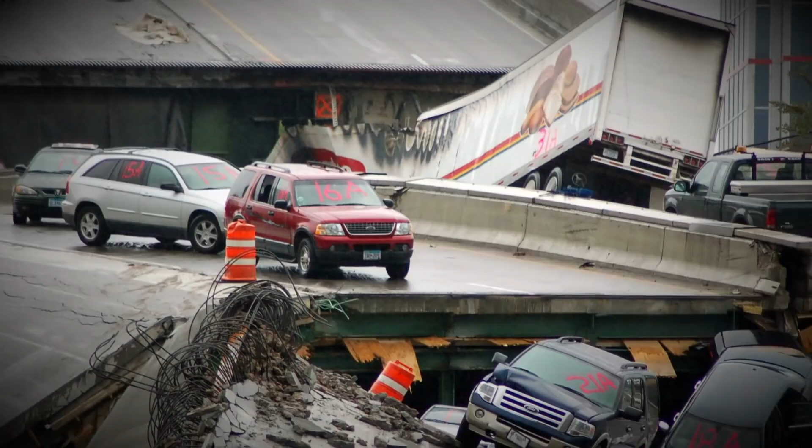But little did the commuters know that they were travelling on borrowed time. The bridge failed in the blink of an eye, plunging the vehicles down into the Mississippi River below. Today we're covering the Mississippi Bridge collapse, and as such I'm going to rate it here 6 on my disaster scale, and again here 6 on my historical legacy scale.

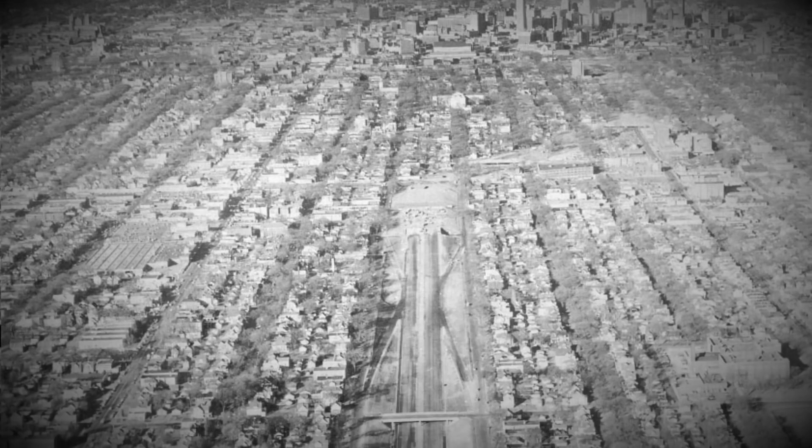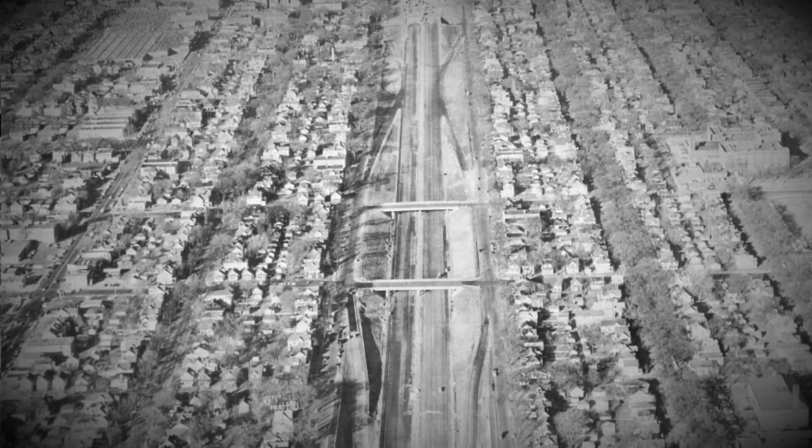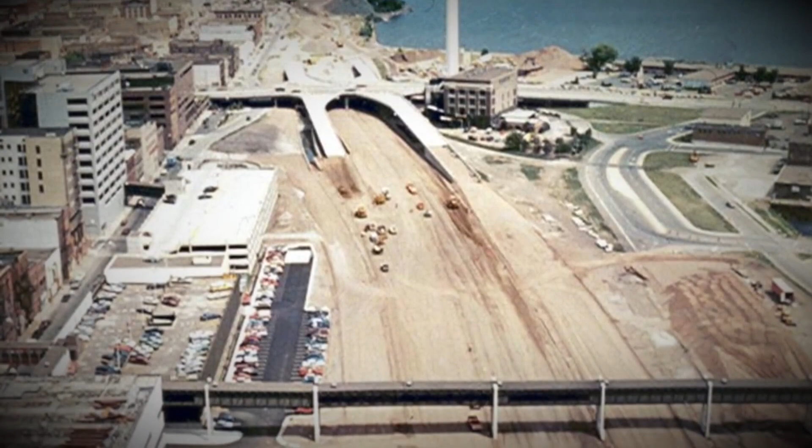In the early 1960s, plans were drawn up to cross the Mississippi River as part of the colossal construction of the I-35, a monumental 1,569-mile north-south cross-country interstate highway project. Parts of what would become the I-35 had been constructed pre-1956, the date on which the interstate system was formed in the US. The route would eventually be completed in 1982, and it ran from Minnesota in the north all the way down to Texas in the south. And part of the route would have to travel through Minneapolis, necessitating the crossing of the Mississippi River.

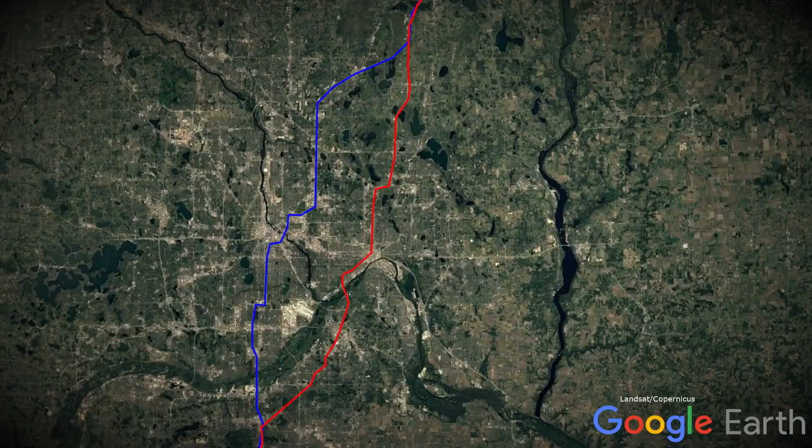As a side, the I-35 in the region actually splits into 2, the I-35 West and the I-35 East. This allowed the highway to be brought into Minneapolis and St. Paul respectively. Both branches rejoined in Columbus. In 1962, plans were begun to be put on paper on the I-35 West River crossing. As part of the design process, engineering firm Sverdrup and Parcel were hired on to produce a preliminary engineering report, create final design plans, checked by a registered professional engineer, and check design computations.

On the 12th of April 1963, 2 options were presented to the Minnesota Department of Transport, a 4 and a 2 truss design. Sverdrup and Parcel recommended the latter for economic reasons, which was the option selected by the department. The accompanying report from Sverdrup and Parcel stated welding is planned throughout for the makeup of girders and truss members, and, in this connection, high yield strength steel conforming to T1 will be used extensively. They also commented that the use of welding compared to riveting would save the department money, but in reality the use of T1 steel had an overall cost implication.

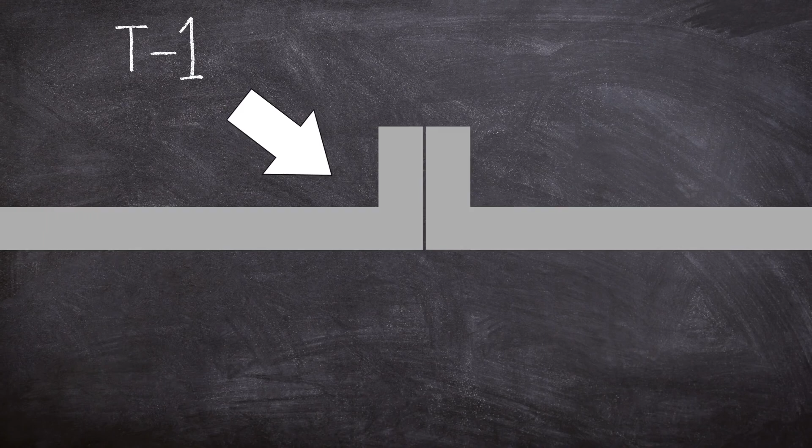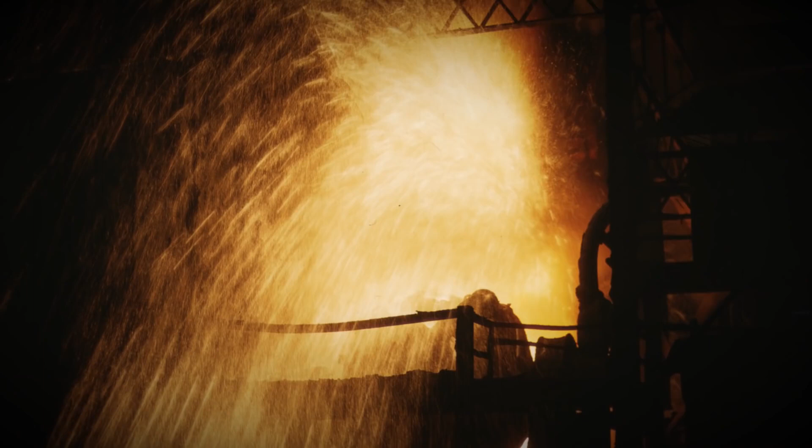By September, both Minnesota Department of Transport and the Federal Highways Administration began to express reservations about using such large quantities of T1 steel in the bridge. You see, T1 is a very strong construction material, but this comes with a drawback: the way it is heat treated. And as such, members made of T1 are limited by the size of the heat treatment facilities where they are produced. This meant that there would be a need for more joints, which incurred extra cost during construction. Not only that, but the material was more expensive compared to other steel types at the time. T1 was 38 cents per pound, compared to the weaker A441 steel that was around 31 cents per pound, and could be made in longer sections due to the different heat treatment processes.

During the March 1964 conference, Minnesota Department of Transport and the Federal Highways Administration decided that Sverdrup and Parcel eliminate T1 steel from all main truss members and use A441 and A242 steels instead. This required a redesign, as the A441 and A242 steel had a capacity of 27,000 pounds per square inch versus 45,000 pounds per square inch for T1. Due to the weaker steel, the design had to be replanned and required thicker steel, which in turn added more deadweight to the structure.

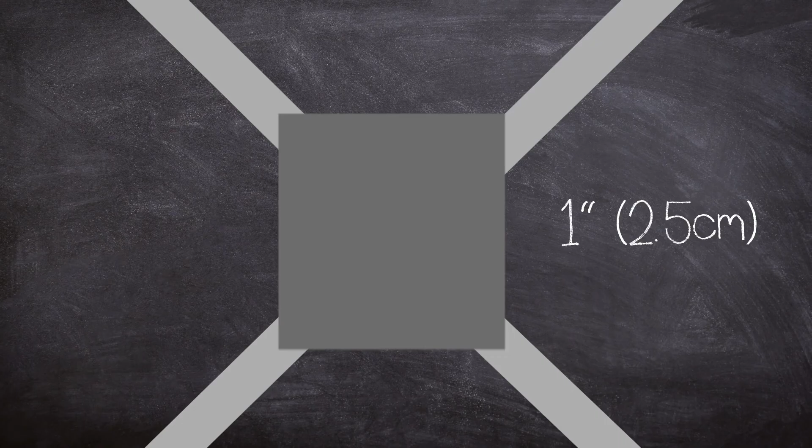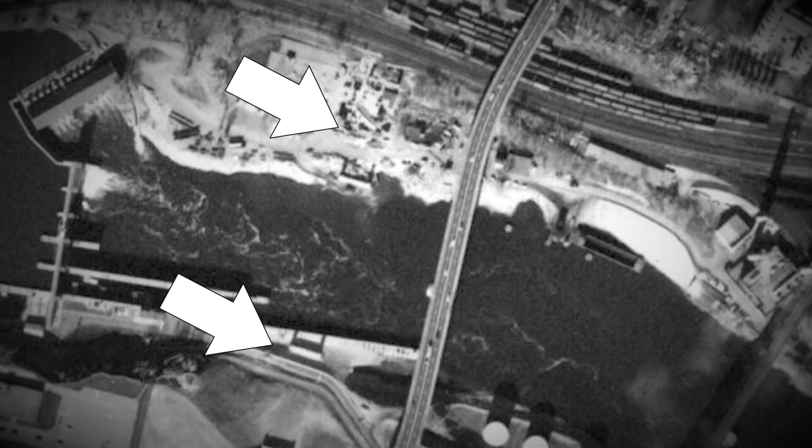However, some of the original 0.5-inch T1 steel gussets weren't thickened when the change to weaker steel was employed. The ones that were improved in the final design were up to 1 inch thick, and it might be worthwhile remembering this for later on. The final design was settled upon by March 1965. However, initial works to build the piers had already started in 1964. Let's first look at the actual design accepted.

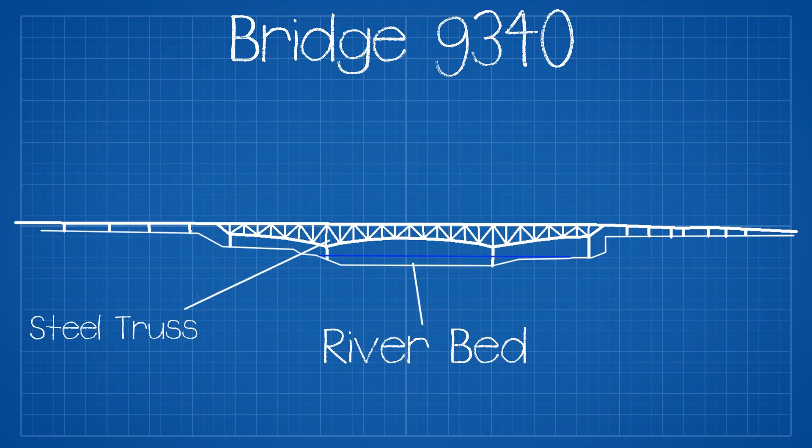The structure used welded built-up steel beams for girders and truss members, with riveted and bolted connections. The bridge was 1,907 feet long and carried 8 lanes of traffic, 4 northbound and 4 southbound. The bridge had 13 reinforced concrete piers and 14 spans, numbered south to north.

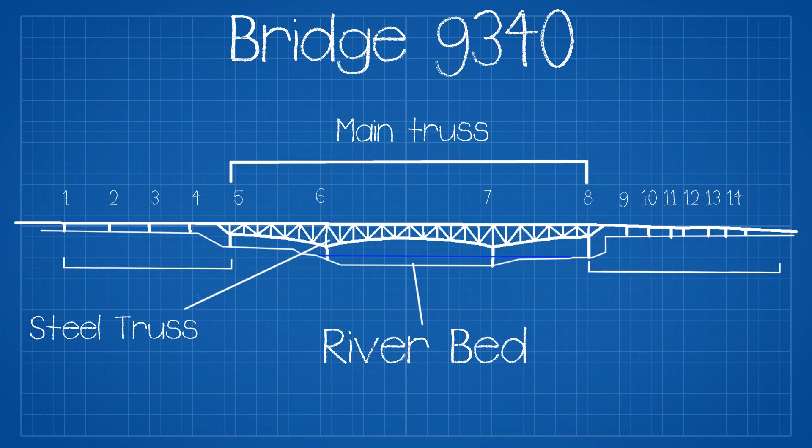11 of the 14 spans were approach spans to the deck truss portion, which was only 3 spans long but was over 1,000 feet in length. The bridge deck in the approach spans was supported by continuous welded steel plate girders or by continuous voided slab construction. The 3 main spans used deck truss construction, consisting of 2 reinforced concrete deck slabs separated by about 6 inches, with a total width of the deck slabs of about 113 feet 4 inches. This was enough to accommodate all 8 lanes of traffic.

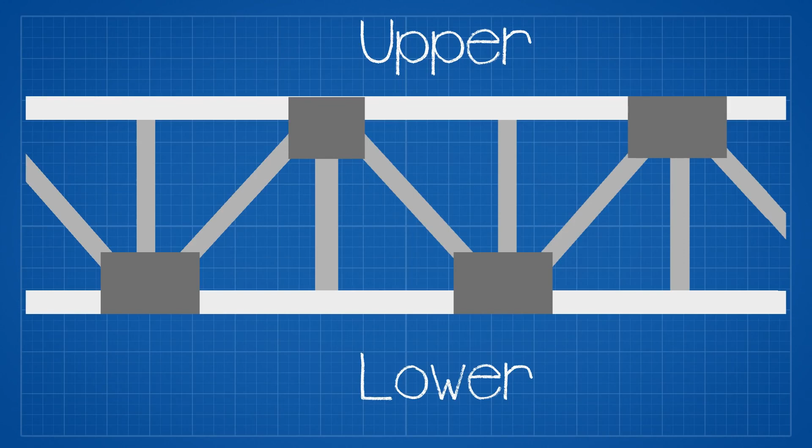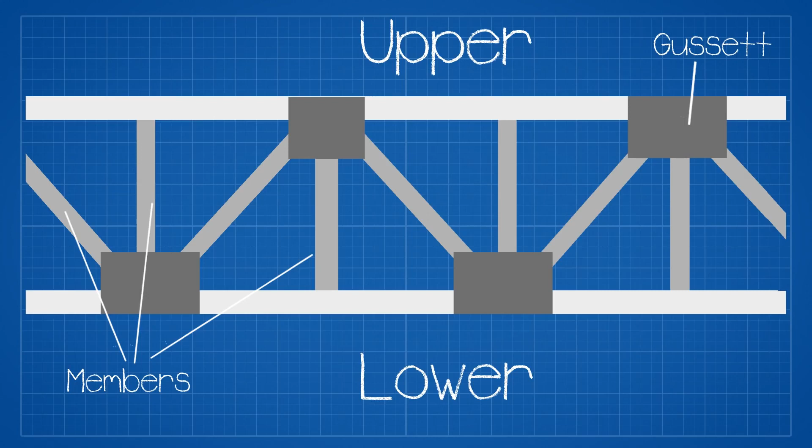The main trusses comprised 2 parallel main sections. This was made up of upper and lower chords that extended the length of the deck truss portion of the bridge. For added strength, the chords were connected by straight, vertical and diagonal members. To connect these together at each junction, gusset plates were installed and riveted together. These were made of steel. To connect the east and west trusses, bracing members were utilised.

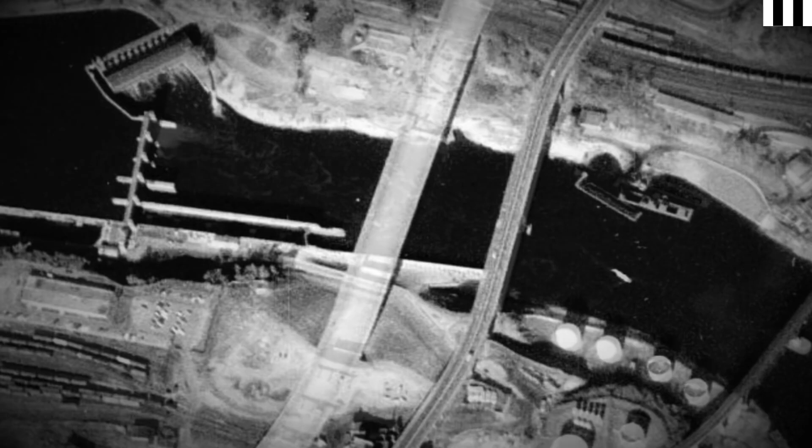Construction was completed in 1967 and opened to traffic, and for 10 years or so all seemed well, until it reached its first renovation in 1977. Back in 1967, when the bridge was initially constructed, it had 1.5 inches of concrete over the uncoated top reinforcing bars of the bridge deck. This was pretty standard for the time, but by the 1970s a number of similar structures were experiencing rebar corrosion.

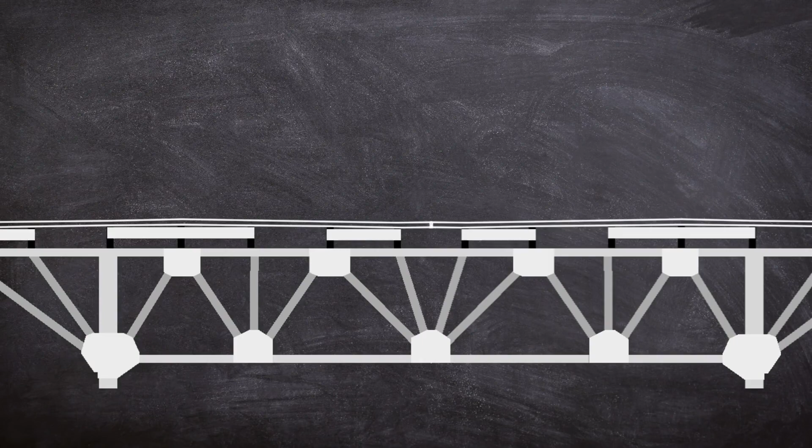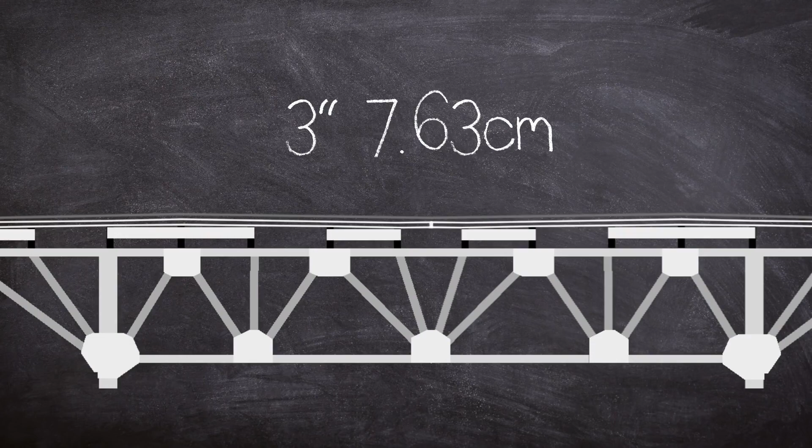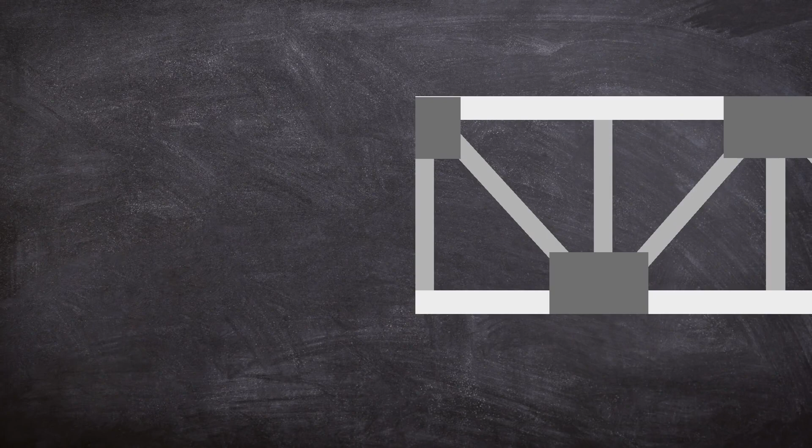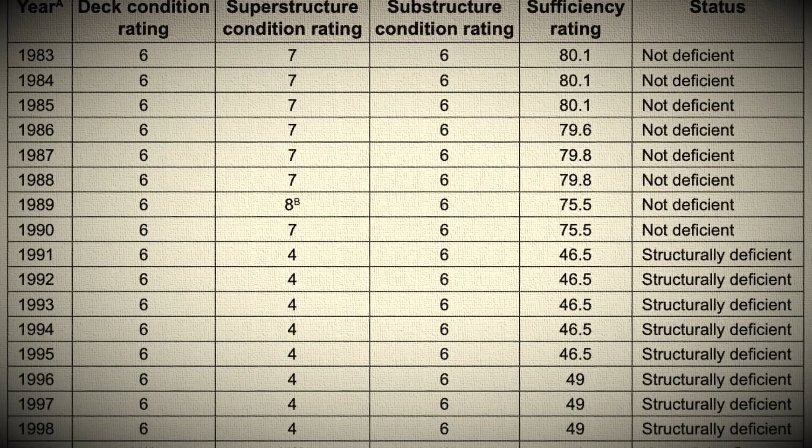In order to combat this, a thicker layer of concrete was poured on top of the bridge, bringing the total thickness to 3 inches. But this came with an issue, and that was the increase in weight on the truss structure, in the region of roughly 3 million pounds or 13.4%. All throughout the bridge's life, the structure received an annual inspection, starting in 1971. Part of these inspections were a general condition and evaluation report, but after 1991, the results took a nosedive.

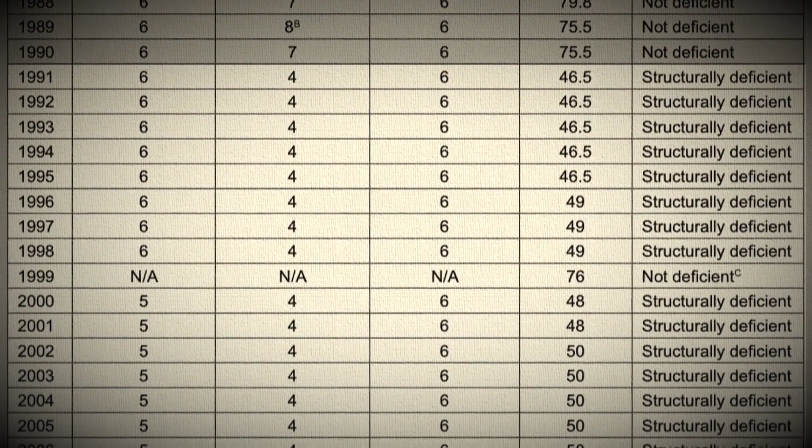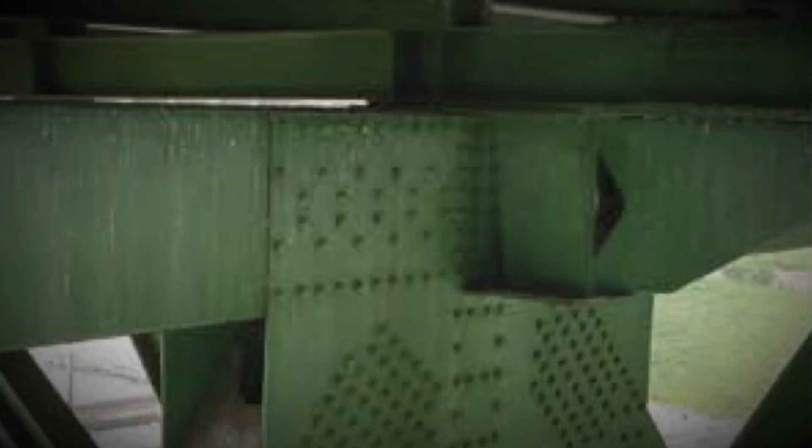As part of the annual survey, the bridge is given a status, and at the start of the 1990s, it received an unsatisfactory structural deficiency rating. A status does not indicate that a bridge is unsafe, but only that the structure is in need of maintenance, repair or eventual rehabilitation, and as such, a weight restriction is given. However, in 1993, some gusset plates had experienced corrosion.

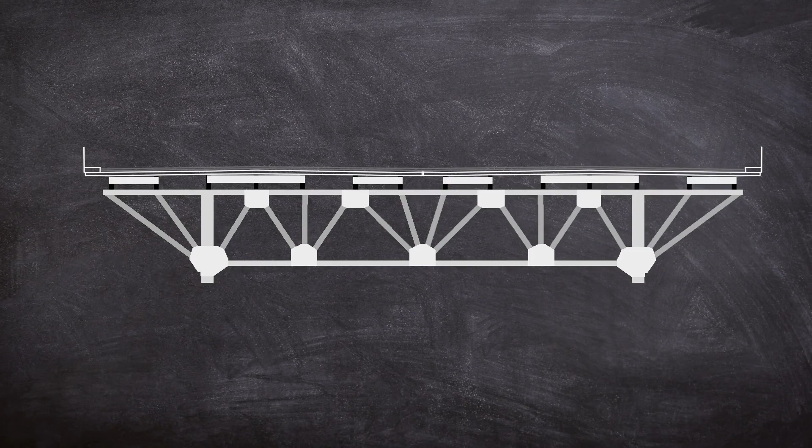In 1998, another refurbishment project was underway at the bridge. This involved improving several features, including the central barrier and outside traffic railings, which did not meet the at-the-time safety standards. And like in 1977, the permanent changes increased the dead load on the bridge by about 1.13 million pounds, or 6.1%. In the early 2000s, cracking was discovered and was drilled out and reinforced, and a process of 6-monthly inspections was enacted. And this brings us to the bridge's final renovation, leading to 4 of the 8 lanes being closed on the I-35W bridge.

The 2007 renovation involved removing some of the concrete and adding a 2-inch thick concrete overlay on the deck. Part of the construction works involved staging materials on the bridge, ready for use. This increased the static load by roughly 578,000 pounds, right over one of the 0.5-inch thin gusset plates. During the works, throughout July, the staging of materials was not raised as a concern, and as such, for each surface pour, tons of sand, rock and water were stored right over some of the most vulnerable portions of the bridge.

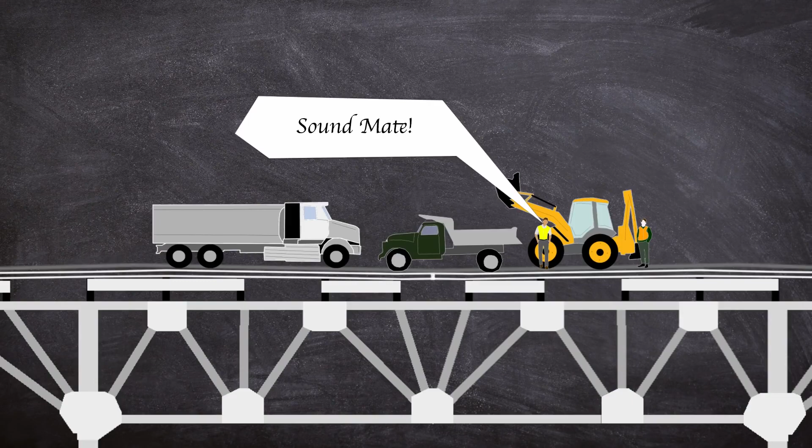On the afternoon of August the 1st, 2007, the contractors working on the bridge were preparing to pour a 530-foot overlay in the southbound inside lanes. The pour was set to be undertaken at 7 p.m. due to the hot summer sunshine, and in the lead-up to this, large amounts of materials were stored on the bridge, and 2 cement tankers were fully loaded at 80,000 pounds and were parked over Pier 6 and the weakened gusset plates. To add more weight to the bridge from the concrete pour, the busy evening rush hour traffic crawled its way over the open lanes, further concentrating the weight on the structure. The inevitable would happen at 6:05 p.m.

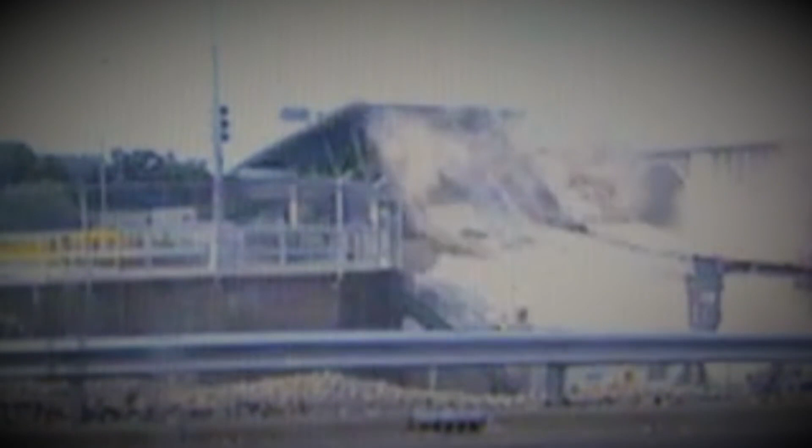The central span of the bridge suddenly gave way, followed by the next spans. The structure and deck collapsed into the river and onto the riverbanks below. There was a motion control security camera, and this captured the dramatic and fatal moment of the structure's failure.

There were 111 vehicles on the bridge when it collapsed, and this included public as well as personal vehicles. Many were plunged into the river, the banks, and the rail yard below the span of the bridge. The first call from 911 dispatch went out at 6:07 p.m. and at 6:08 p.m. Minneapolis 911 dispatch made a distress call requesting that all available emergency assistance personnel attend the scene.

Many of the first people involved on the scene were locals and others stuck in traffic. Just 5 minutes after the collapse, police were on scene and began to coordinate the rescue efforts. Within an hour of the collapse, 12 public safety agencies responded with 28 watercraft to assist with the river rescue operations, helping to recover many victims from the Mississippi River.

Some sections of the roadway were resting on top of the river, leading to the occupants of some of the vehicles being stranded, necessitating 93 being rescued from various precarious situations. In the summer evening, many lined the banks of the river to watch the unfolding dramatic rescue efforts launched by the first responders. By 7 p.m., the rescue efforts started to move towards search and recovery as the submerged vehicles needed to be identified.

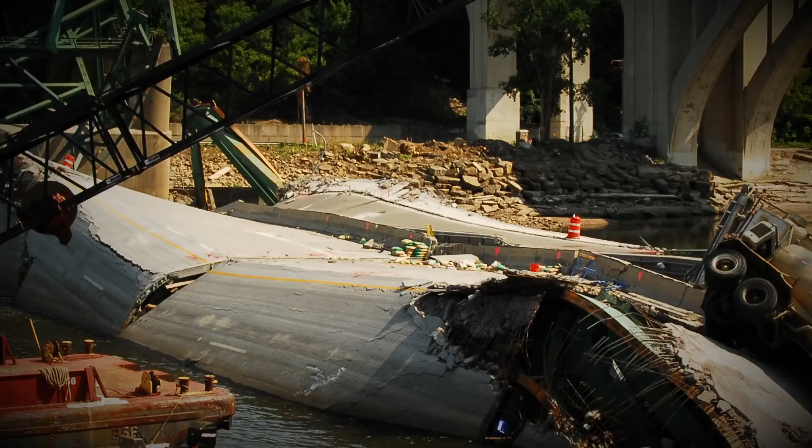By the next morning, many were still unaccounted for, and as such, the river was lowered by 2 feet by the Ford Dam downstream. It would take 3 weeks for the final body to be removed from the wreckage site. The collapse had a total of 190 casualties, 34 of whom were seriously injured and 13 would be killed.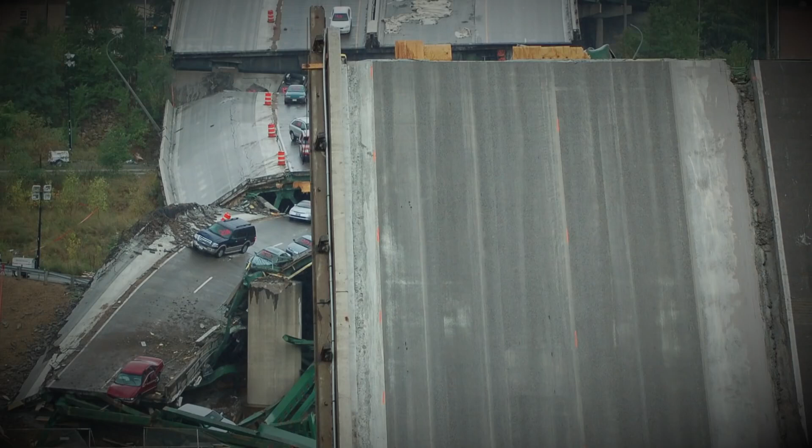On the 6th of August, the United States House of Representatives and the United States Senate each voted unanimously to secure $250 million in emergency funding for the state of Minnesota. With traffic now rerouted away from the bridge site, many dead and millions of dollars worth of damage, the NTSB set out to find the reason for such a dramatic and sudden structural failure.

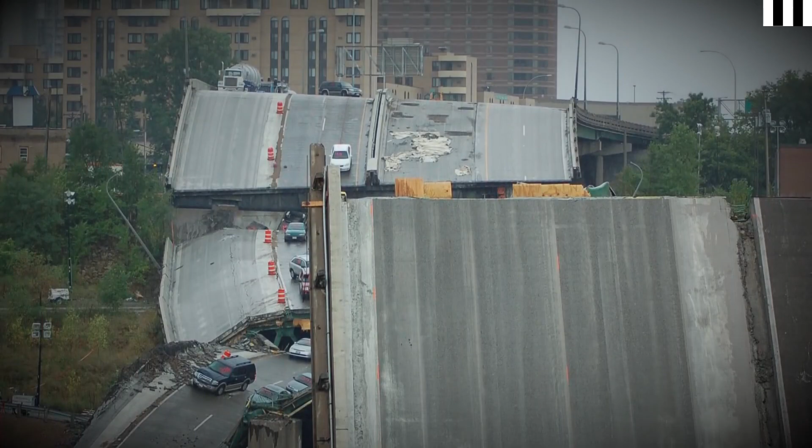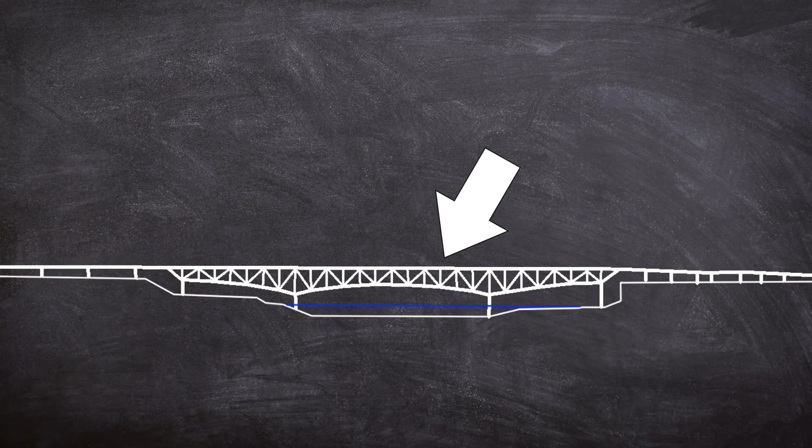Every piece of the structure that was recovered underwent scrutiny. Investigators found that gusset plates at the upper node 10 had fractured. The fractured gusset plates, coupled with fractures in the lower chord members between L9 and L10 nodes, resulted in completely separating the main trusses in this area, thereby allowing the centre span to drop. Analysis of the security camera footage showed that failure had begun towards the southern end of the centre span, centred on the gusset plates and their material thickness.

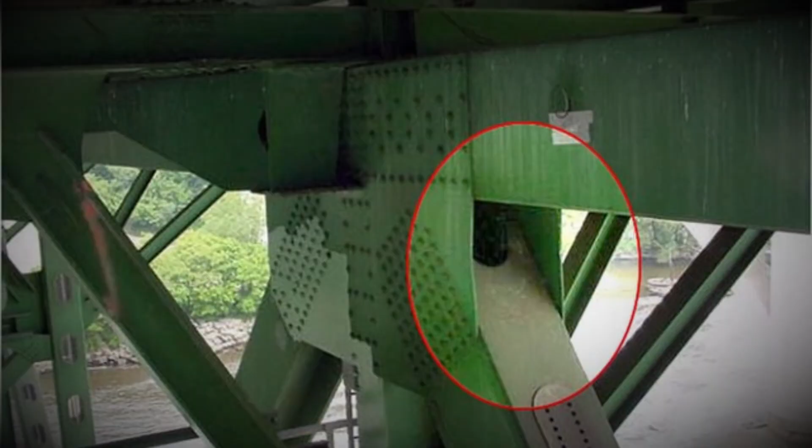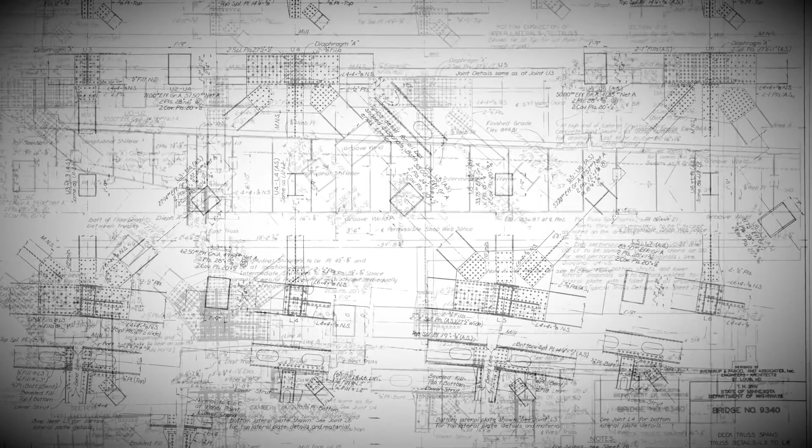And the NTSB concluded that some had inadequate capacity for the expected loads on the structure, which was further compounded by the increased weight during the 1977, 1998 and 2007 refurbishments. Ultimately, the NTSB report released in 2008 concluded, due to a design error by Sverdrup and Parcel and Associates of the gusset plates at the U10 nodes, which failed under a combination of substantial increases in the weight of the bridge, which resulted from previous bridge modifications.

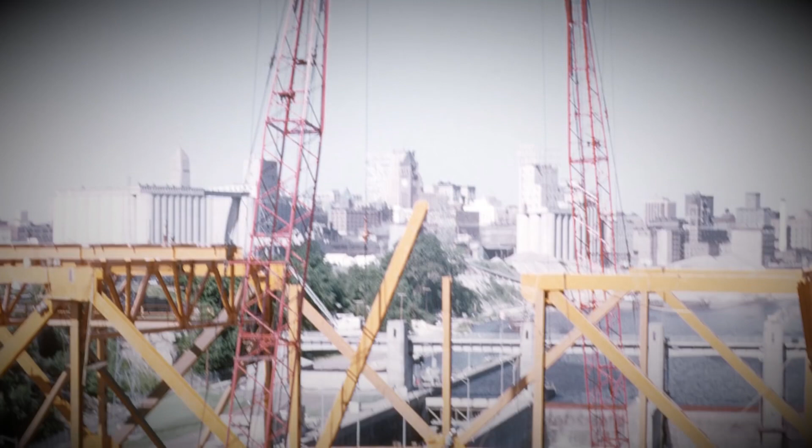Sverdrup and Parcel received a great deal of blame along with the state transport officials for giving inadequate attention to the gusset plates during inspections. Needless to say, the financial implications went beyond the recovery and cleanup for the state. On the 2nd of May 2008, a $38 million agreement to compensate victims of the bridge collapse was settled.

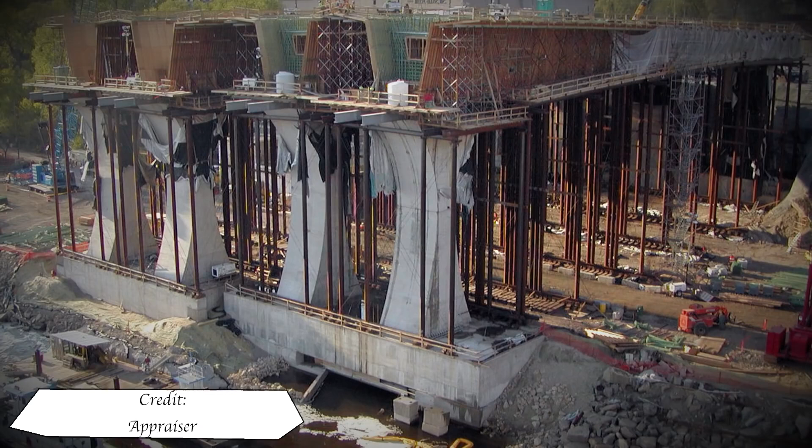Another $52.8 million was received by the victims from URS Corporation and Jacobs Engineering Group, the successor of Sverdrup and Parcel. They also agreed to pay the state $8.9 million in an out-of-court settlement. The bridge would be replaced and opened on the 18th of September 2008.